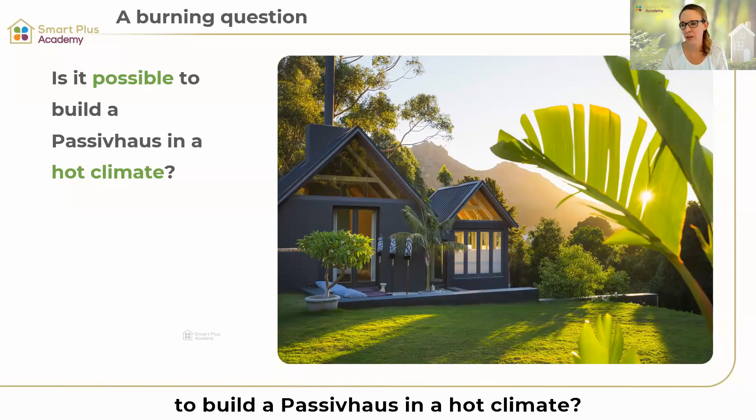I want to address a very burning question with you: is it possible to build a passive house in a hot climate? This is a question I get asked a lot, because after all, passive house originated in Germany, where we have a cool temperate climate, right?

So we all understand that works there, but can we build a passive house in a hot climate as well? To answer that, I want to ask you to imagine something.

Imagine that it's summer, you're at the beach, and you're having a relaxed lunch with family and friends. Because it's hot, you want to bring some cool beverages.

Picture that scenario: would you rather take an esky or a cardboard box for your drinks to the beach on a hot day?

If you said you'd rather take the esky, that's probably the clever answer. So you're taking your esky, and would you ask everyone to close the lid again after taking a beverage?

You probably would, because if the lid is left open, hot air would come inside your esky, which wouldn't help keep your drinks cool. Also, would you put that esky in the sun or in the shade? You'd probably put it in the shade, because that way your drinks stay coldest for the longest duration.

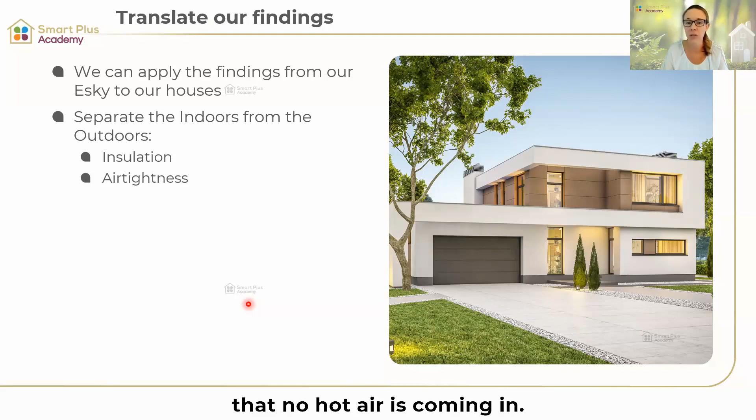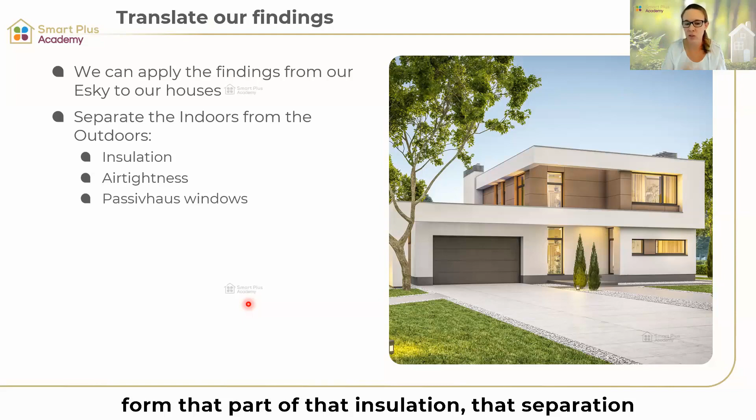We want to close the lid so that hot air is not coming in. We want to close the gaps in our thermal envelope so no hot air gets in. And we want to have passive house windows, which form part of that thermal insulation layer, that separation between inside and outside.

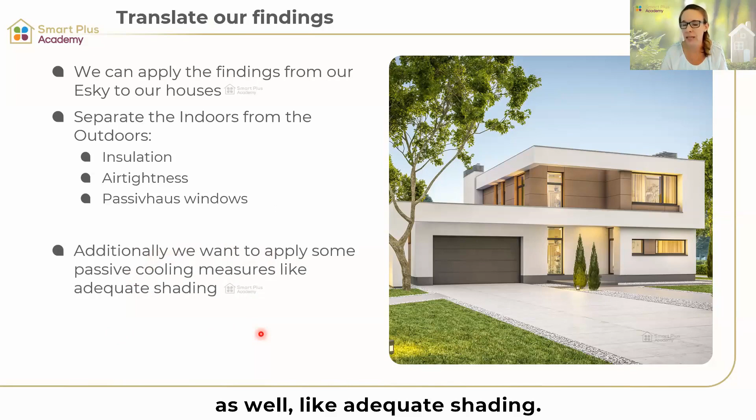Additionally, I asked about putting the esky in the sun or the shade. We want to apply some passive cooling measures as well, like adequate shading. I'll talk a little more about other passive cooling measures we can apply in our passive house, and if overheating is still an issue after all these measures, we can introduce some active cooling.

Like a split system aircon. That's how we can keep cool in our passive house, but we've got a lot of options to stay cool without even touching the active cooling component.

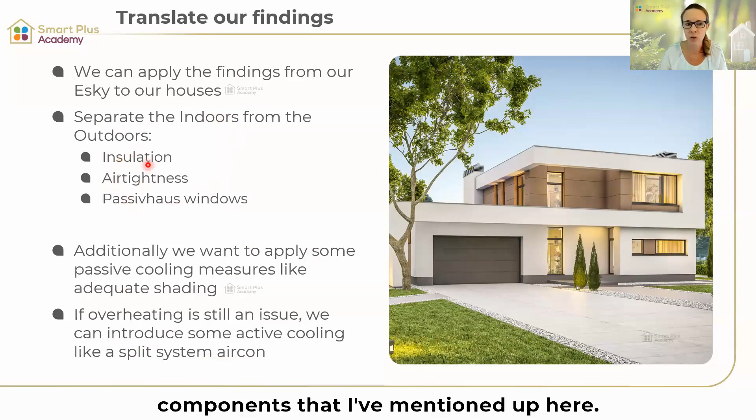We want to talk about that now, why that helps us stay cool in a passive house. So the first thing I want to address is these passive house components I've mentioned, our passive house components.

The first one here is thermal insulation, probably the biggest one to keep us cool. Thermal insulation reduces transmission of heat. It's a material with low heat transport, so low conductivity, that's used to shield a volume against the gains or loss of heat.

We're saying gains or loss because now we're applying that to either a hot or cold situation. The thermal insulation protects against a different temperature, and that works in winter as well as in summer. We can protect against that different temperature no matter where the hot side is, because heat doesn't know the difference between inside and outside.

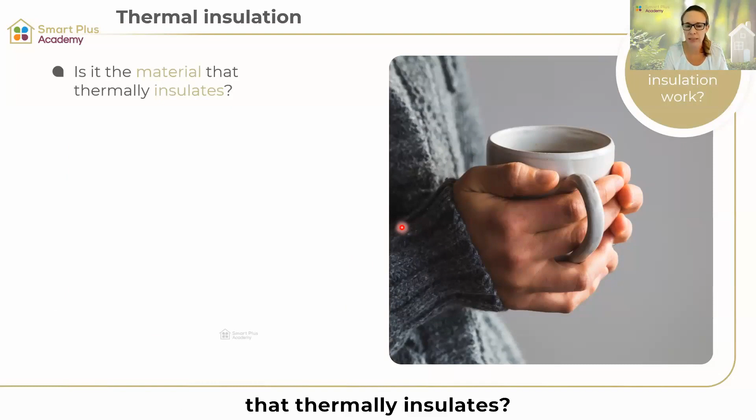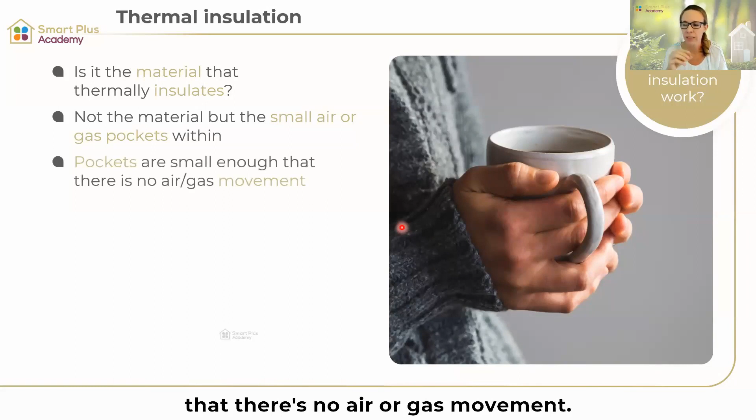So now I want to go a little bit into why thermal insulation works. Is it the material that thermally insulates? No, it's not the material, but it's the small air or gas pockets within that material. The pockets have to be small enough that there's no air or gas movement, so we don't want any convection. Convection means gas movement or air movement. None of that, and then we can talk about a thermally insulating material.

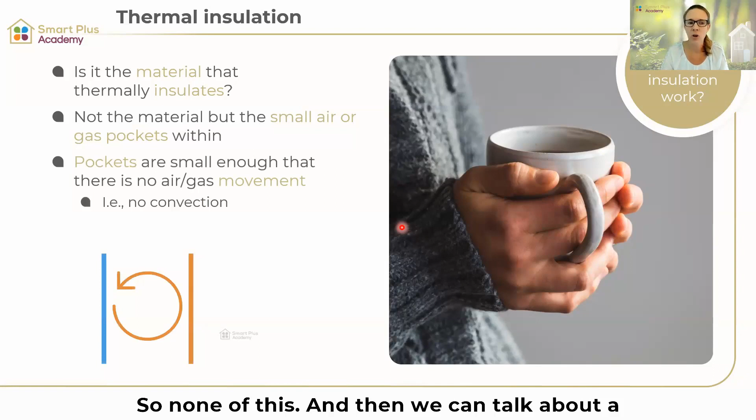Think about all the materials you typically would use for thermal insulation - a fluffy mineral wool, or a foam that has a lot of air bubbles in it. Anything that has air in it is good for insulating. It's a little bit like your woolen jumper on a cold winter night, or like your esky on the beach, where that esky has foam around it that's also full of air bubbles.

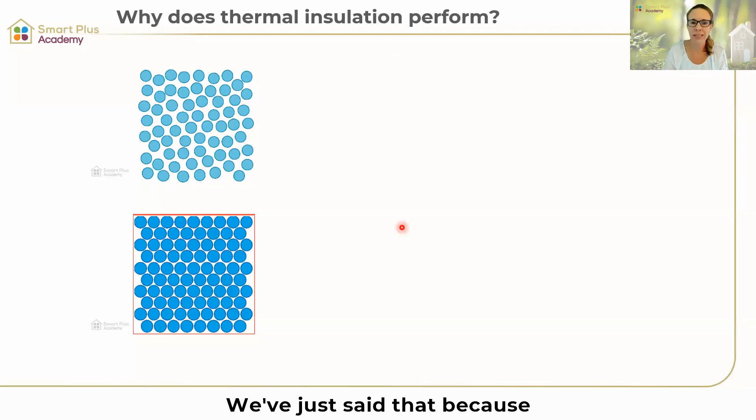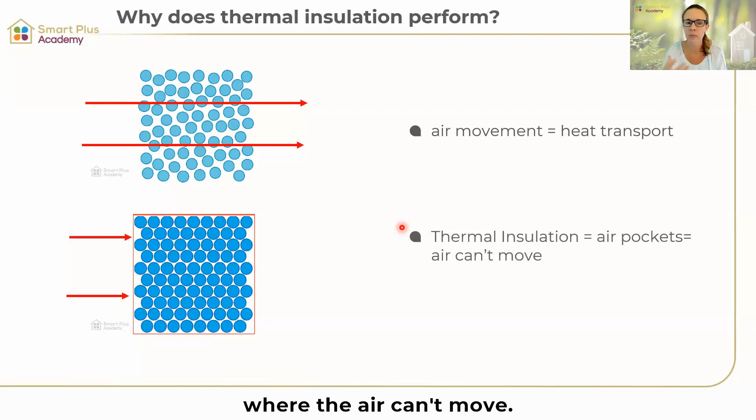Talking about those air bubbles, why does this thermal insulation perform? We've just said it's because we don't have air movement. Air movement always means heat transport - air transports heat from one side to the other, depending on which side is warmer. So what we need to do is isolate that, stop that air movement. Thermal insulation has air pockets where the air can't move. Only when we have inclusion of air that's protected against air movement does that insulate.

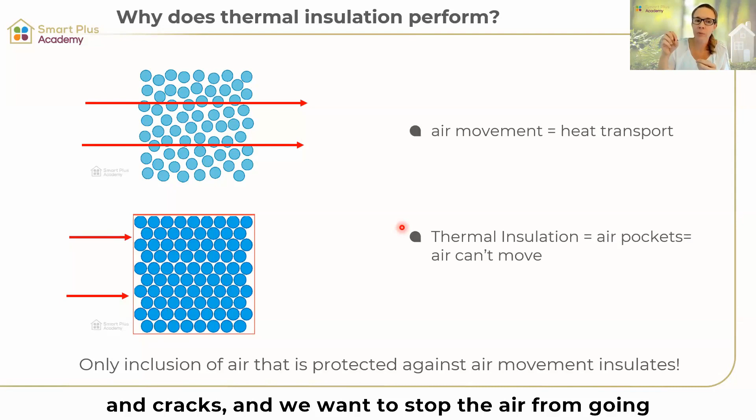That brings us to our second part, which is air tightness. Do you remember how I said close that lid? That's a little different because here it's going through a gap, not through the actual insulation itself, but that's what we want to do. We want to stop the air from going through any gaps and cracks, and stop the air from going through the insulation as well. So our air tightness is really important to isolate the indoor environment from the outdoor environment from any air movement.

That also protects us from hot air coming into our interiors. You could imagine if you had a very well protected home, but you had a gap somewhere, or a crack somewhere, or you left the window open a little bit, all that hot air would come in, and that's why we need air tightness as well.

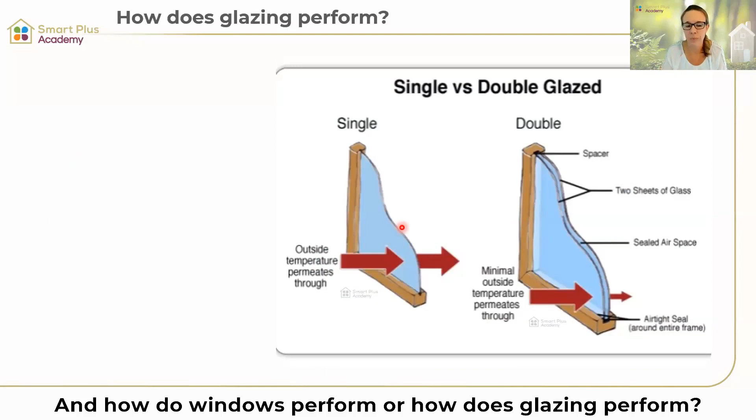Then I talked a little bit about windows. Windows are a big part of the thermal envelope, and they need to perform as well. How do windows perform, or how does glazing perform? If we're looking at a single pane of glass, with or without foil or coating, that doesn't matter - it's not sufficient, it doesn't perform. A single pane of glass doesn't perform because the temperature can just permeate through. Glass is a very good thermal conductor, so it conducts heat very easily from one side to the other.

You would have probably experienced that if you had a glass mug and put some hot beverage in it - you would burn your hands really easily because glass transports that heat really easily. What would you do? You would probably use a double-walled glass where we now have that layer of air in between the two layers of glass, and that's exactly what we're doing with the window. What makes the difference is the air pocket with still air in between. That makes the big difference, and that makes it so it can insulate.

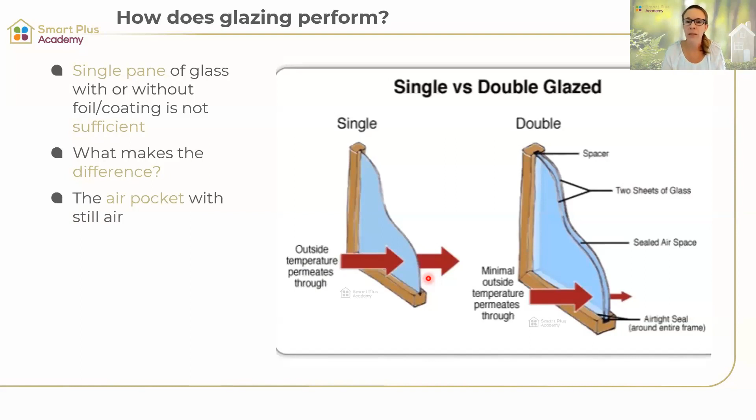Now we've talked about some of the Passivhaus components. It's not all of them, but these are the main ones that keep us separated from the indoor environment and the outdoor environment, that keep us cool.

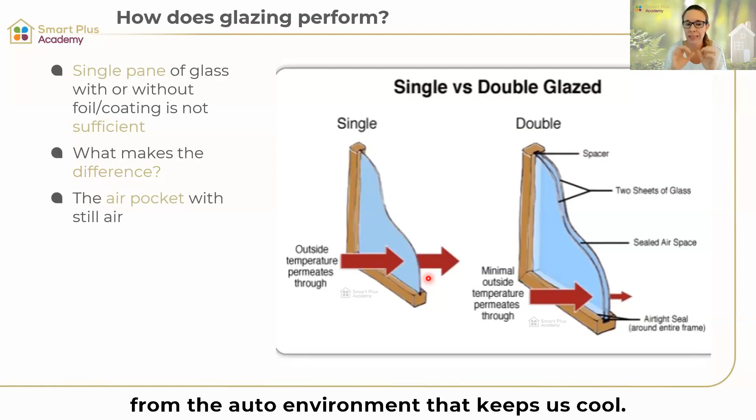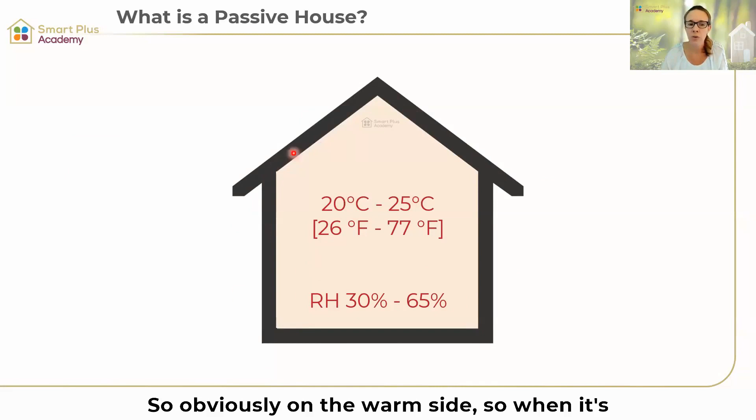What does Passivhaus achieve with such a good thermal envelope? I want to show you this picture. We have our Passivhaus where inside we have our thermal comfort zone between 20 and 25 degrees. That's what we want to achieve. On the warm side, in summer, we stay at a maximum of 25 degrees.

On the hot side, Passivhaus allows 10 watts per square meter to go through our thermal envelope. That's the limit Passivhaus has set. 10 watts per square meter can go through that thermal envelope - that's what we're allowed to let in, and that's what we need to get rid of on the inside.

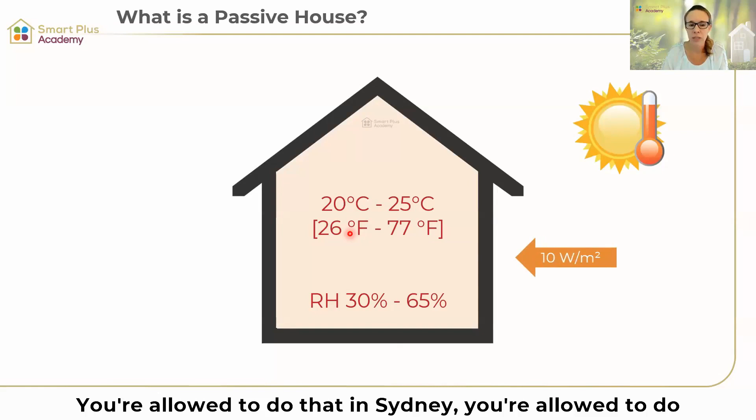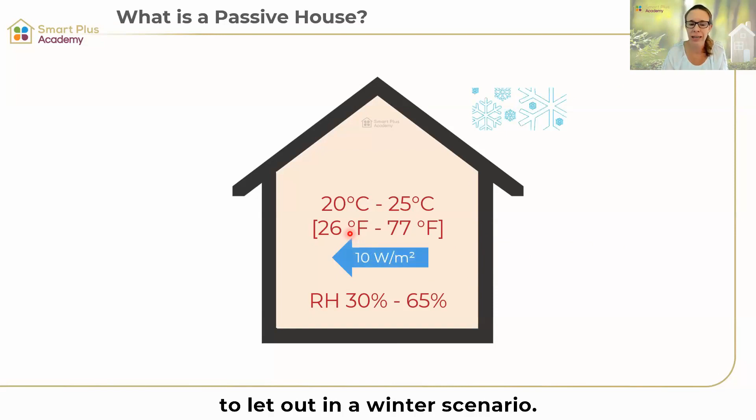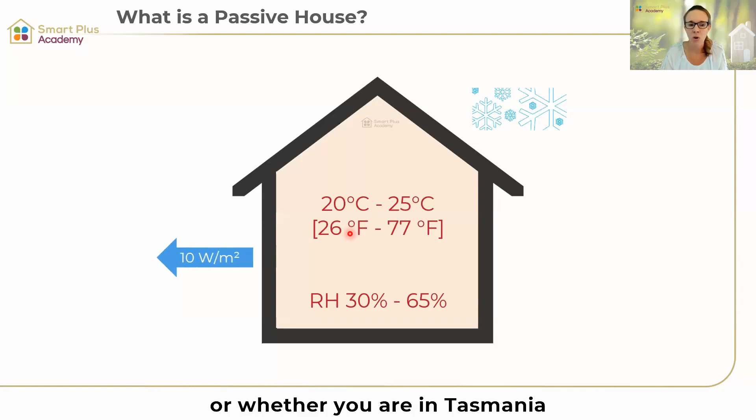This 10 watts per square meter is allowed in Perth, in Sydney, in Germany, and in a very hot country, somewhere in the desert. It's always the 10 watts per square meter. It's also the 10 watts per square meter we're allowed to let out in a winter scenario - on the cold side, that doesn't matter whether you're in Antarctica, Tasmania, or Melbourne. It's always the 10 watts per square meter.

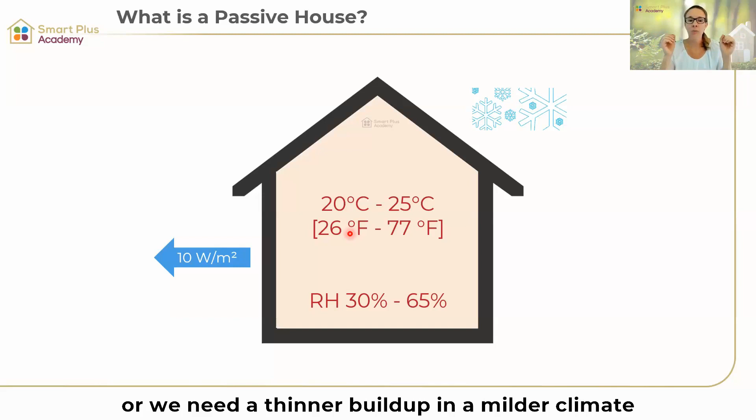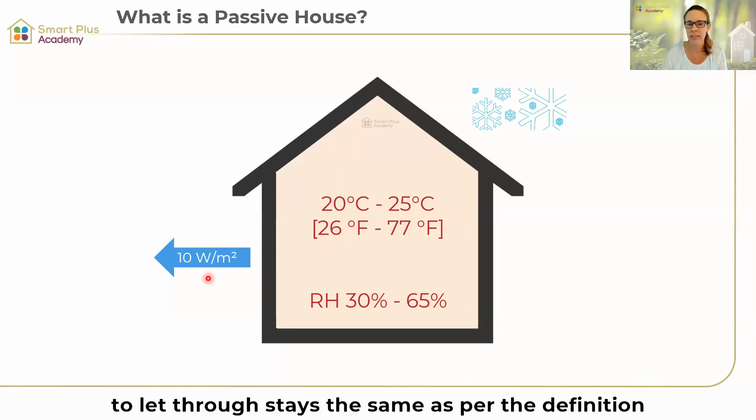What does that mean for our thermal envelope? If it's always the same amount of energy allowed in and out, it means we have to adjust our thermal envelope to the climate condition we live in. In a harsher climate we need a thicker buildup to protect us from that heat, or a thinner buildup in a milder climate. The buildup changes, but the amount of energy allowed through stays the same, as per the definition of the Passivhaus standard.

We could now look at our thermal differences. What is the thermal difference? It's the difference between our indoor temperature - our thermal comfort range of 20 to 25 degrees - and our outdoor temperature, where we have extremes on the high and low side.

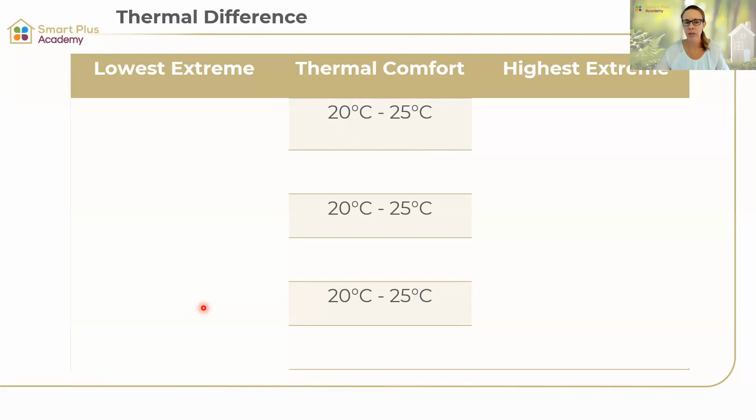Let's look at what happens in different climate zones. We have a thermal comfort range of 20 to 25 degrees. If we live in a climate with a highest extreme of 45, we have a temperature difference to the hot side of 20 Kelvin. Kelvin is another way of expressing temperature difference - between 25 and 45 is 20 degrees difference, 20 Kelvin.

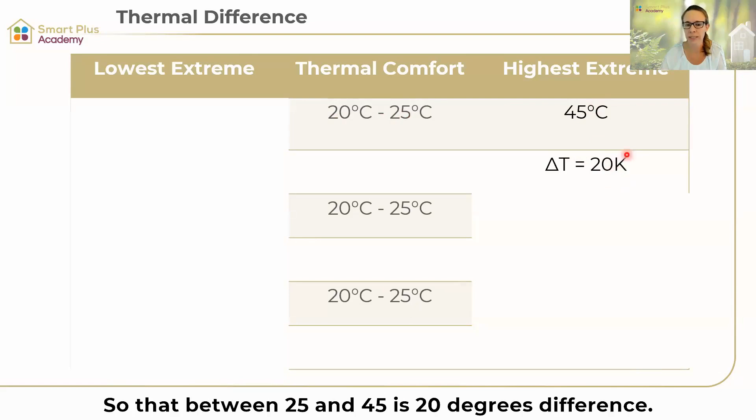On the lowest side, like a typical Sydney or Perth climate, relatively mild, the lowest extreme is about 0 degrees, giving a temperature difference of 20 Kelvin as well. So on both sides we have the same temperature difference, and we have to build our buildup so it can withstand that 20 Kelvin difference.

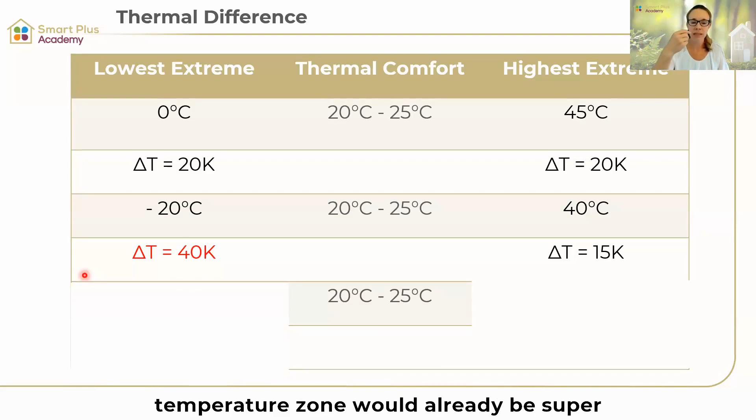If we live in a more extreme climate, like a European or German climate where it gets up to 40 degrees, our hot extreme is only 15 Kelvin, but our cold extreme could go down to minus 20 degrees - a 40 Kelvin difference. That becomes dominant, so we'd have to build our envelope to withstand the 40 Kelvin difference - really thick. This means the building would already be super protected for the hot climate too, since they've prepared for winter, they're also well prepared for summer.

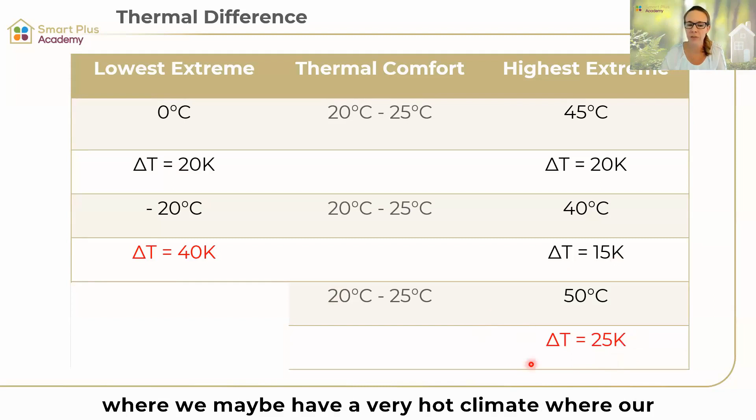Then there's the other extreme, a very hot climate where our highest extreme is higher - say 25 Kelvin difference - and it maybe only goes down to 10 degrees. So we need to adjust the thickness of our thermal envelope to this highest degree extreme on the hot side.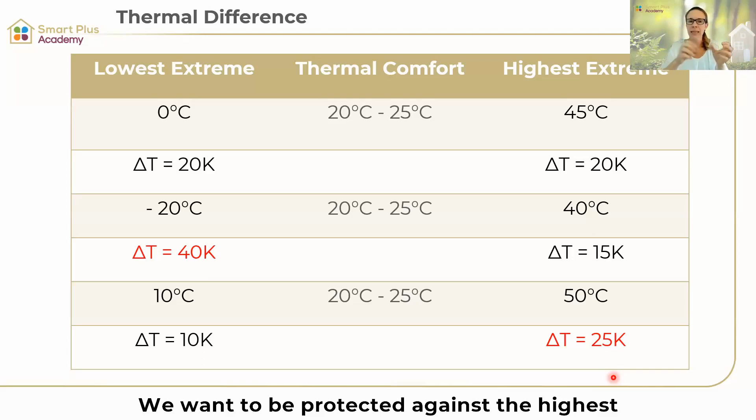So we always want to be protected against the highest extreme that we have, the highest temperature difference. And that's what Passivhaus is doing. We are adjusting with measures like thermal insulation, air tightness, and windows to be protected against the highest extreme in our climate.

Now I want to come to cooling measures. Our thermal envelope protects us from the heat coming in the first place, but we can also introduce other passive cooling measures. I've already mentioned one: shading. I want to talk about a few of these, because that's the first thing you can do in your Passivhaus to stay cool the longest without any additional energy spent.

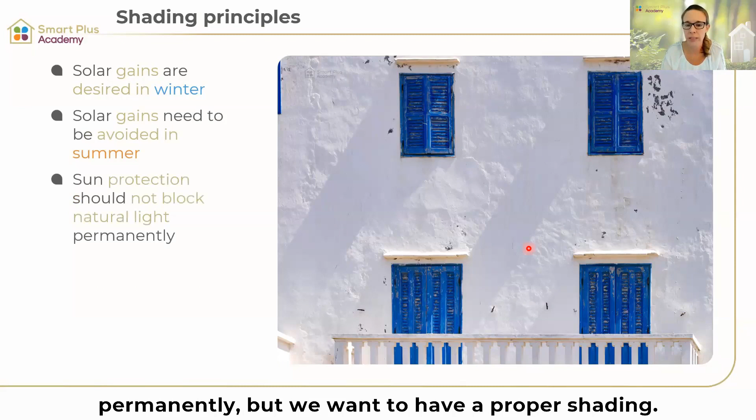So the first really important one is our shading. We probably know this because we've grown up in a warm climate. Shading principles say that while we want sun into our building in winter, we really want to avoid it in summer. The sun protection should not block natural light permanently, but we want proper shading so we're not getting heat in, and we want some glare protection as well.

So how effective, or when is our shading most effective? What we want is the shading object not creating a subclimate between the glazing and the shading object—that's when it works best. A good example could be a mountain in the distance, another building, or trees, because there is enough air movement between that object and your glazing.

But if we have another shading object that we're designing onto our building, these are things we often can't influence. If we're creating a shading object that creates a higher temperature on the glazing surface, then the shading benefit could be reduced.

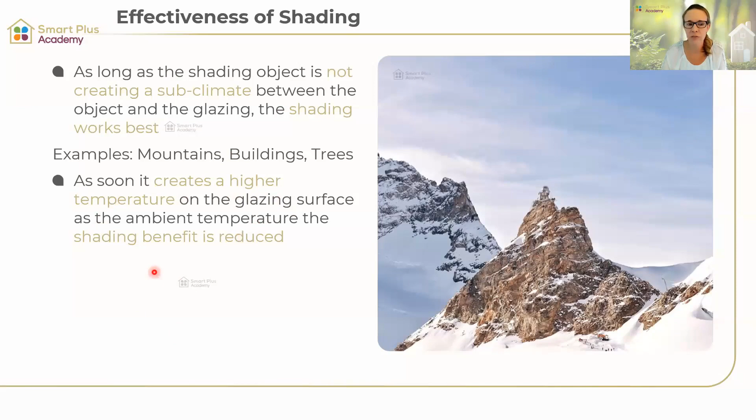So an external blind, even roof overhangs sometimes, could have that negative effect. I want to show you what I mean in the next slide. The effectiveness of shading is reduced by producing this heat pocket. Here we have a blind on the frame.

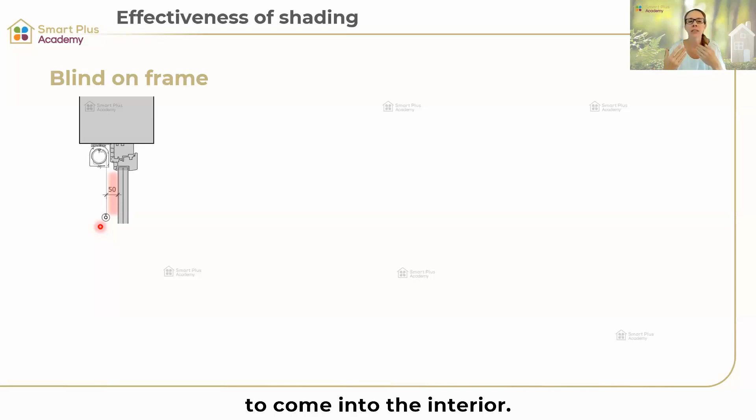Shading devices should always be on the outside. Remember that. A shading device on the inside, like a curtain or a honeycomb blind, doesn't have the same effect because the heat is already in your building envelope. If you shade it from the inside, the heat is already inside, that energy is already inside—we're just delaying it a little bit before it comes into the interior. So shading needs to be on the outside.

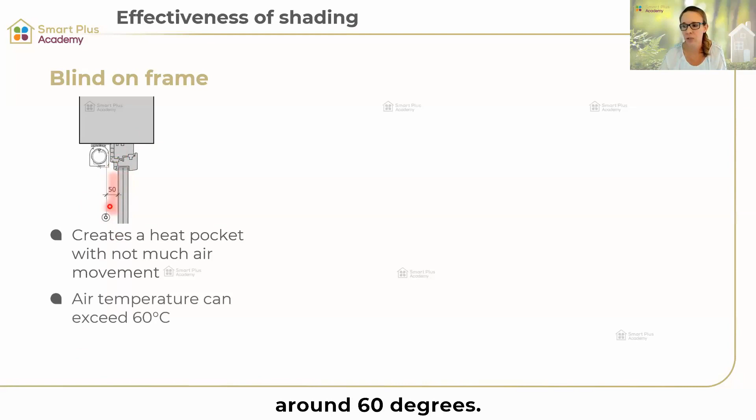Glare protection can be on the inside, but you want your shading on the outside. What happens here is we're creating a heat pocket with not much air movement, and that air temperature in this pocket can be around 60 degrees. So that 60 degrees will come through your glazing inside instead of the 35 or 40 degrees that's the ambient temperature. The same could still happen with a blind on the facade—here there's a little bit of air movement, so a little better, but temperatures can still be high.

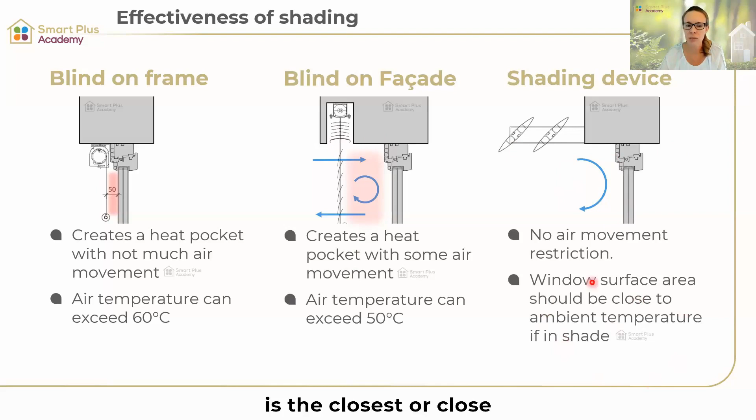Ideally, you want a shading device that looks like this, where we have no air movement restriction, and where the air out here is close to the ambient temperature if it's in the shade. That's your best bet for your shading.

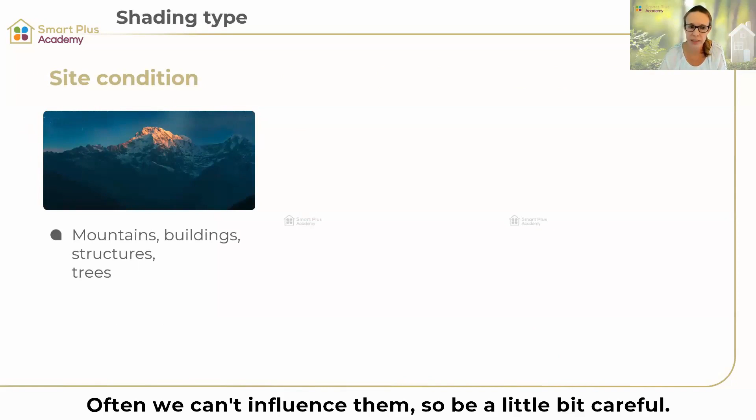Then there are different shading types. As I said, we can have site conditions that give us shading, like mountains, building structures, and trees—often we can't influence them, so be a little careful. If it's a building or tree that could be removed, think about what would happen if that's removed, and whether you need to replace that shading situation.

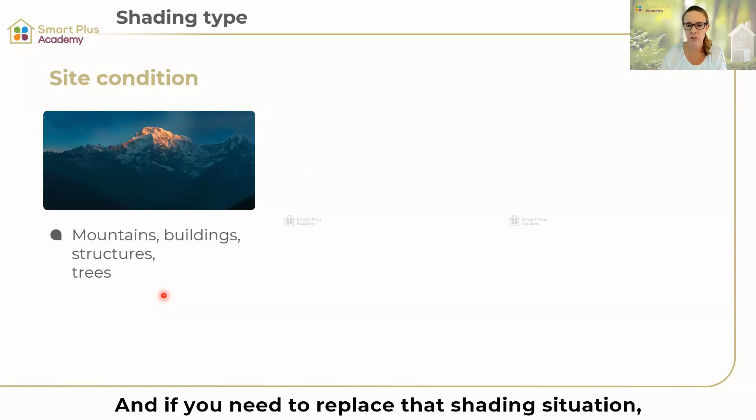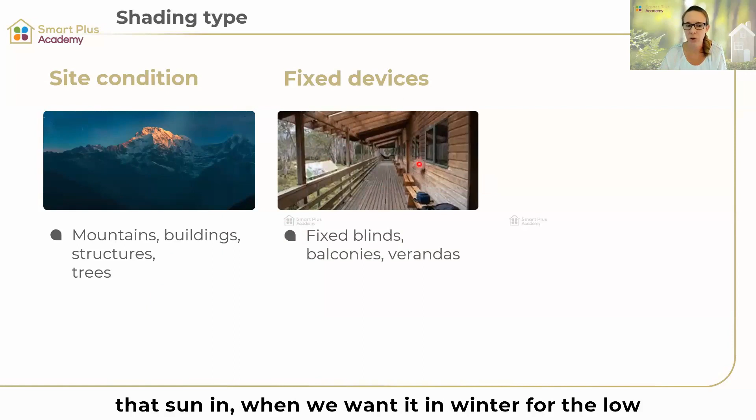Then we can have fixed devices like fixed blinds, balconies, and verandas, which can work really well. They're a little less prone to failure or wrong usage, but we have to make sure we can still get sun in when we want it in winter. For the low sun, we actually want that sun inside to help with heating, but for summer this could be a good option. And then we have movable devices like movable blinds, shutters, and shading sails.

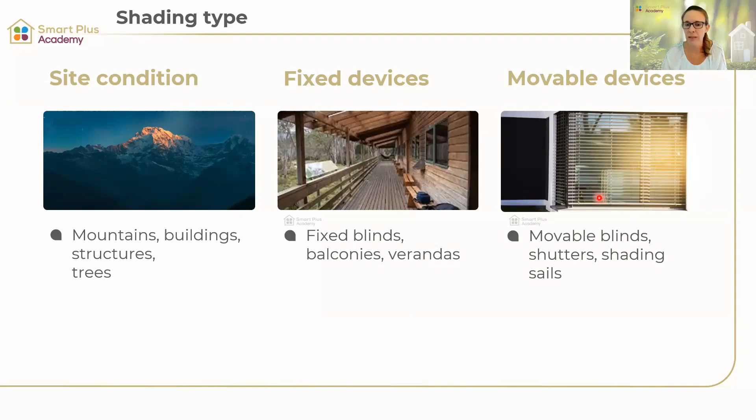They're a good option because they give the user a little bit more flexibility to move it, but also there is then the risk of user error, obviously. But maybe a combination of those would be the right thing to do. Good, so that's one thing.

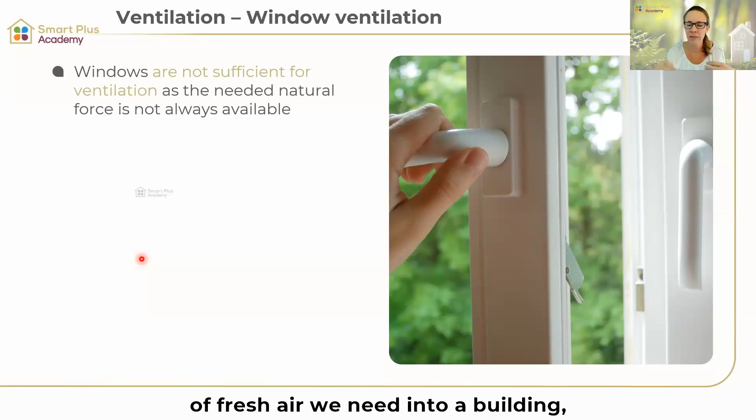Shading is our one passive cooling measure. Then the next thing is ventilation, window ventilation. So what we say and what we've learned in the course - windows are usually not sufficient for ventilation. For the amount of fresh air we need into a building, window ventilation is not sufficient because there's not always enough air exchange happening. Air exchange only happens when we have a pressure difference, and that only happens if we have a different temperature outside, or wind, or a height difference. Some days that's just not given.

So for our fresh air demand, window ventilation is not sufficient, but opening the windows for night purging on a cool night after a hot day, that can be a very valuable support for the cooling system. So that's still good - open your windows when your outside condition is in favor of your inside condition. That happens often when we had a hot day, it cools down nicely at night, and then we could open all our windows. It's a really good support for our cooling system, but it's not ventilation. Remember, there's two different things: ventilation is for fresh air demand, the amount of fresh air we need, and night purging is our support for our conditioning system. So we need to separate that.

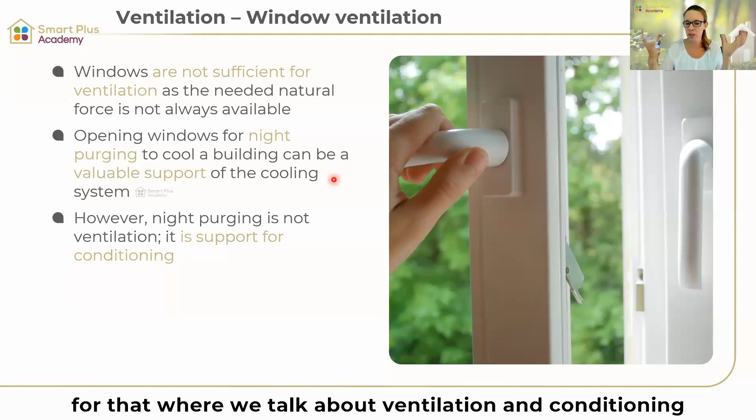I could talk about that a lot more. If you want to learn more, one of our courses would definitely be a support for that, where we talk about ventilation and conditioning and what the difference is between those two.

Now I quickly want to also talk about thermal mass in a passive house, because that's often something that people value as very important in their homes. But I must say that thermal mass is only a storage capacity. The heat is already in the building, and with the thermal mass we can absorb the heat, and the temperature of the air doesn't rise as much and as quickly as without it. So it does have a little bit of an effect, but...

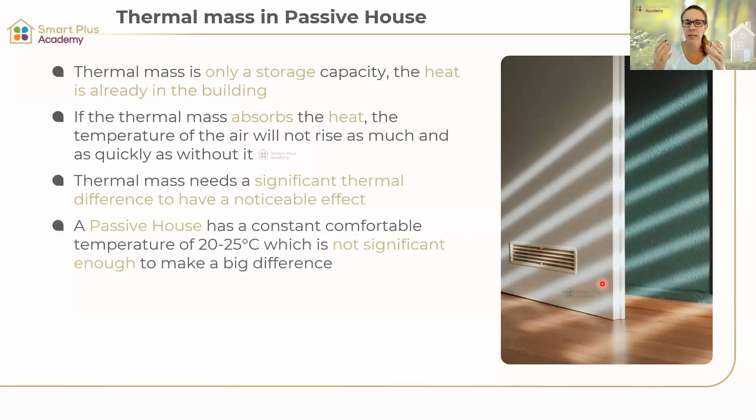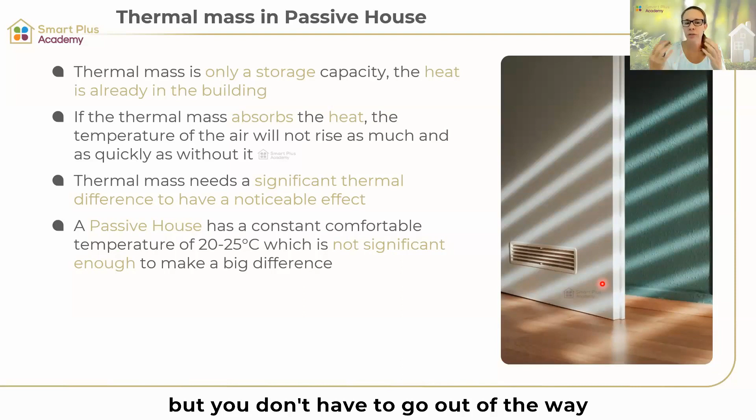Thermal mass needs a significant thermal difference to have a noticeable effect, and in a passive house our temperature is always constant anyway, between 20 and 25 degrees. So this is not significant enough to make a big difference. You'll probably feel a little bit, but it's not significant - it wouldn't make a big difference. So thermal mass in a passive house isn't a big design element. If you have it, it's okay, but you don't have to go out of the way to put thermal mass into your building. It doesn't have a big effect.

The other thing is that thermal mass is not forgiving to user errors. Imagine this: we're here on our summer lunch, we're outside on our balcony, on our terrace, and the people are leaving the doors open all day. It's 40 degrees outside, and everyone's going in and out, the doors are left open. Now all the heat is coming into your building, and the thermal mass would now absorb all that heat. Then the people are gone in the evening, you close your doors, and you're thinking finally it's nice and cool. But now that thermal mass has absorbed all that heat and will release it into the building, and now the building is hotter than it would be without the thermal mass, and you need extra energy to cool that down again, to get rid of that heat stored in the thermal mass.

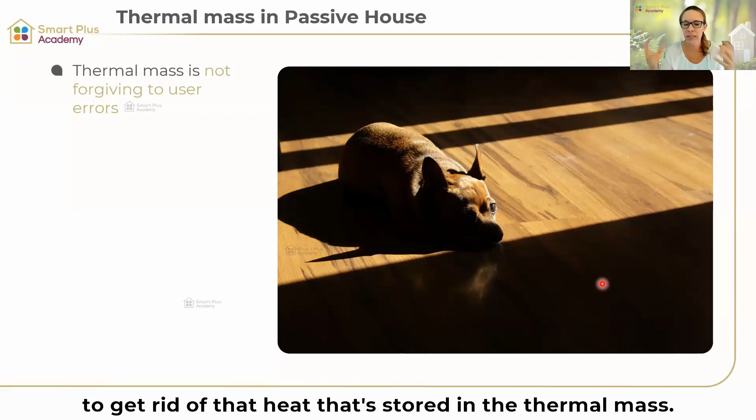It works the other way as well - if the doors and windows are left open in winter and the heat escapes, then you need more energy to heat it up again. So thermal mass could also work against you. Be a little bit careful with thermal mass. It's certainly not something that you have to have in your passive house. It's okay to have it, but it's not a major design element.

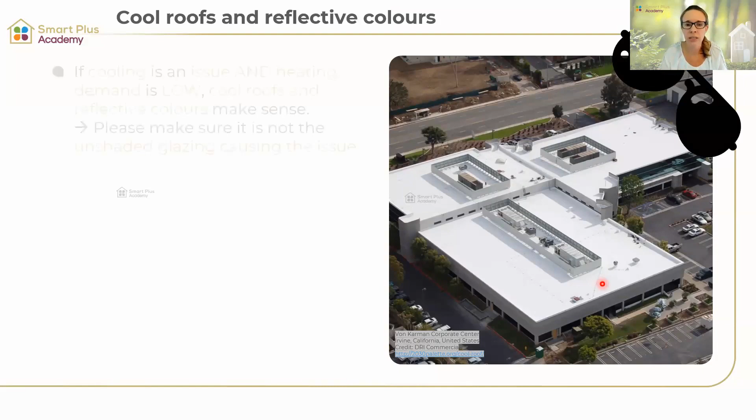And then the last passive measure I want to talk to you about is cool roofs and reflective colors. I think there's been a lot of discussion about this going on, especially with councils - they're sort of promoting this a lot. And if cooling is an issue and heating demand is low, then cool roofs and reflective colors make sense.

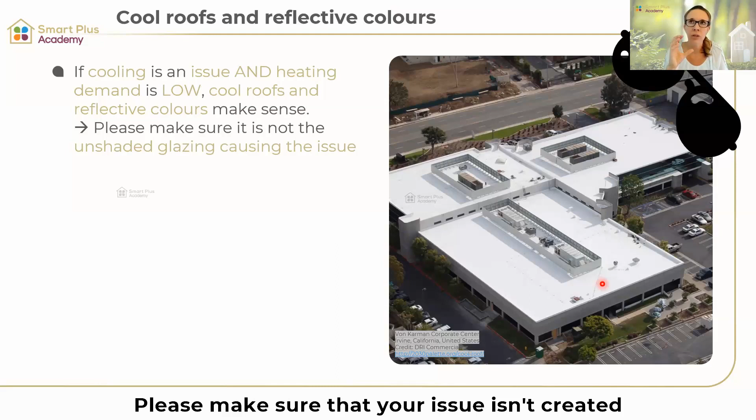Please make sure that your issue isn't created by an unshaded glazing or an unshaded facade, because that's often the case - we have overheating, and the problem isn't really the roof or the color of the roof, but somewhere we haven't put proper shading in for our windows.

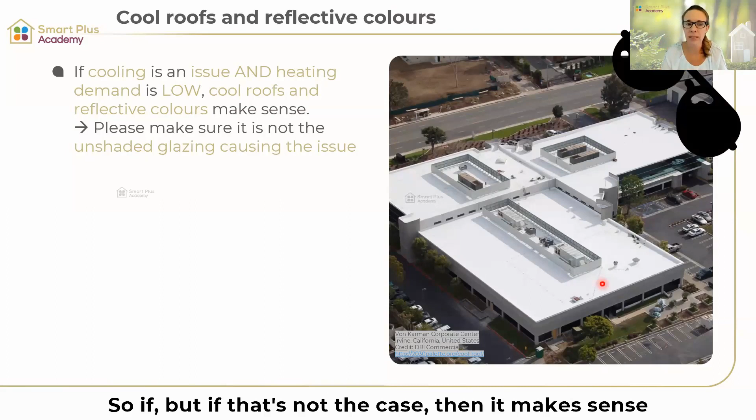So if that's not the case, then it makes sense to have these cool roofs and reflective colors. Make sure that your solar reflectance is bigger than 0.7 and your thermal emittance is bigger than 0.75. This can all be entered into the PHPP, our passive house planning package.

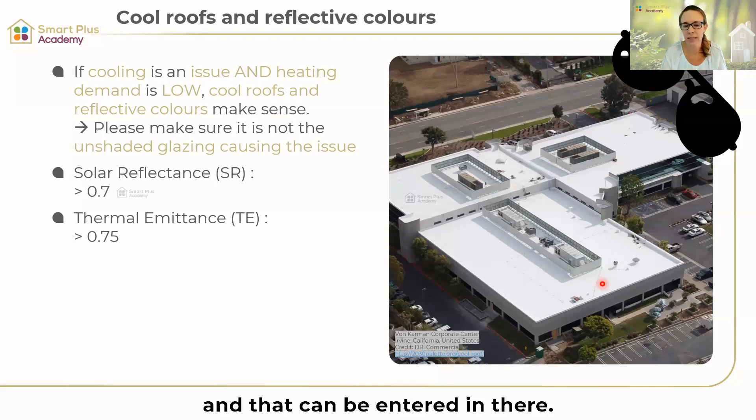So after all this, we've learned about the components that keep us cool, and about passive cooling measures that keep us cool. We could now design our passive house with no conditioning - we don't need an active conditioning system. We're sure that our passive house withstands the heat. And the passive house standard also allows overheating of 10% of the time over 25 degrees.

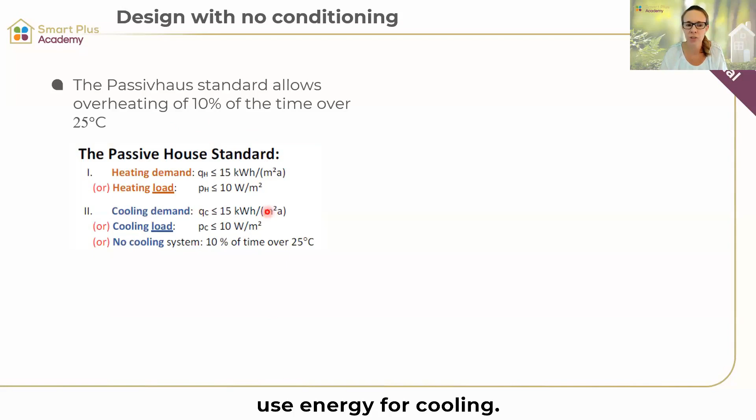So here's a little extract of the passive house standard - not the full standard, but I wanted to show you we're allowed to use a certain amount of energy for heating and for cooling. But we could also say we don't want to use energy for cooling, we want no cooling system in our building. And then we allow 10% of the time over 25 degrees.

So that's what I wanted to point out. Now the question is, is that bad? We're saying we're allowed to have overheating in our home. Some people say, well, passive houses are overheating. Yes, they're overheating by design, by the looks of it, but how bad is that?

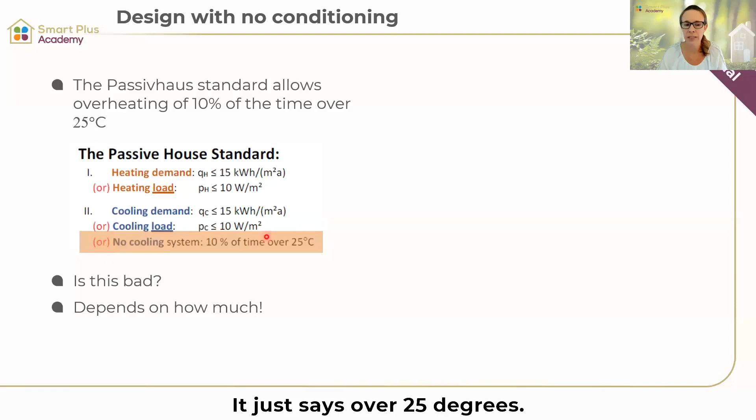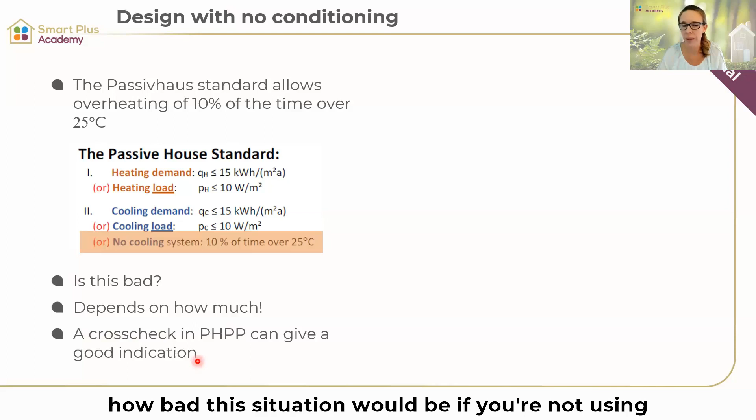It depends how much this overheating is. The standard doesn't say how much the overheating can be, it just says over 25 degrees. What we should do when designing is a cross-check in PHPP, which can give us a good indication of how bad this situation would be if you're not using active cooling measures.

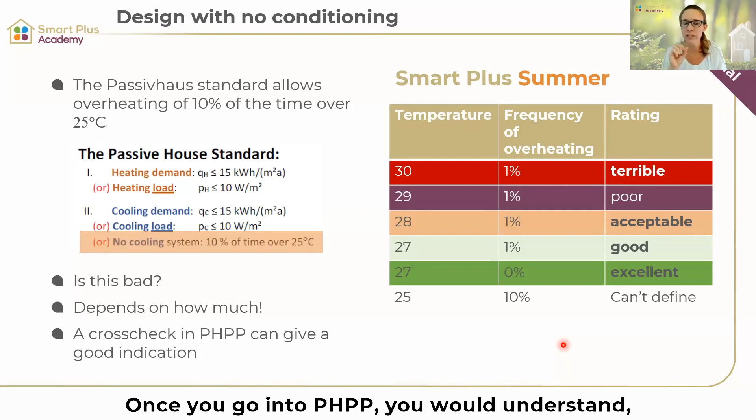For that, I want to show you something we've put together from Smart Plus Academy, Smart Plus Summer, where we're saying we can test our temperatures in our passive house with PHPP. The way we'd do it is adjust our comfort zone. For those who haven't used PHPP yet, don't worry, once you go into PHPP you'll understand - you can adjust your comfort zone temperature.

If that's 0%, then it's excellent, because it means all your overheating happens between 25 and 27 degrees - so your overheating only goes up to 26 degrees. I think we can all live with 26 instead of 25 degrees.

Then if we have 1% overheating at 27 degrees, it's still good. If it goes up to 28 degrees, then it's acceptable. Once we're hitting 29, 30, it's poor or terrible - we don't want a temperature in the home higher than 28 degrees. And that's how we can test it.

That's a very good measure. We're saying that even if we have 20% overheating at 26 degrees, we'd have an excellent outcome, because it's just a little bit warmer - but we need to see how high that overheating is. That's what the Passivhaus standard unfortunately doesn't define, but it's something you should definitely do for your client so you're creating a comfortable, cool indoor environment.

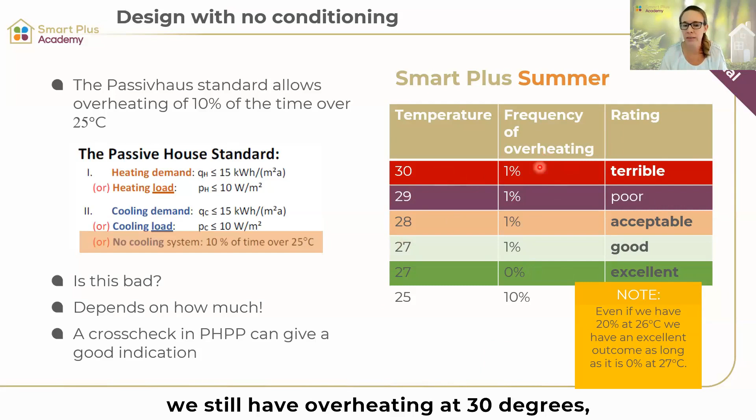So that's designing with no conditioning. If you're saying, look, in my case we still have overheating at 30 degrees, we can't just do it with our Passivhaus components and passive cooling measures - we need some active cooling measures. That can be done. Active cooling measures can always be implemented if you're saying that, yes, we'd have too much overheating, or we just want that little bit of extra comfort.

Now, the question is - is overheating an issue? We're saying that cooling is only needed when the sun is shining.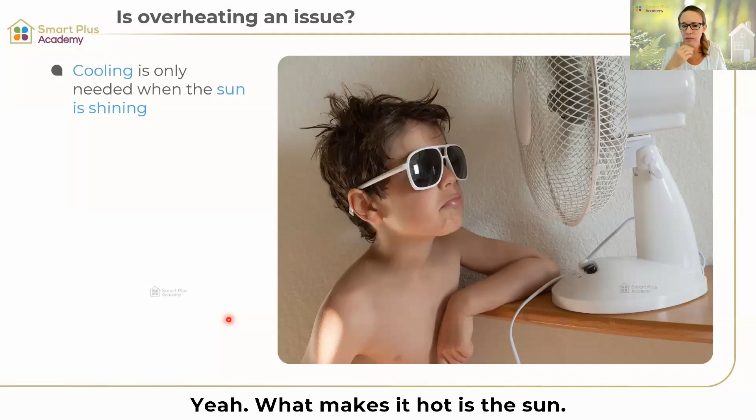What makes it hot is the sun, and the sun is out there when the cooling is needed. Our PV solar system can create energy at that time, so cooling is not an issue, and building in hot climates is easier than in cold climates.

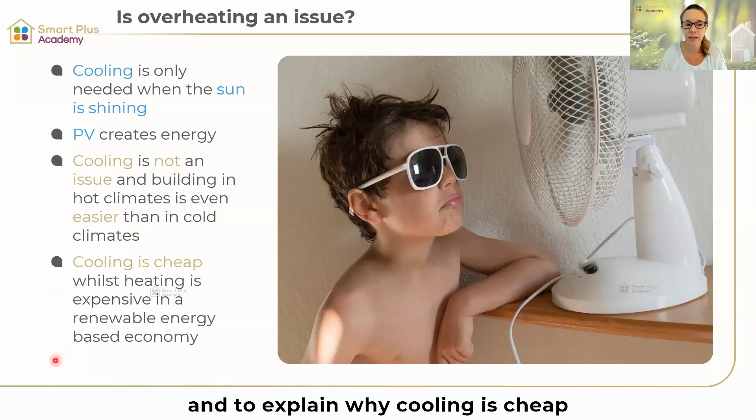Cooling can be cheap, but heating is expensive when we're looking at an economy where we want to use renewable energy. Let me show you a graph explaining why cooling is cheap and heating is more expensive, looking at sustainable energy.

So we're looking at wind, water, and solar - this is the amount produced. We can use some of it directly, which is ideal because we have the least losses. If we're using solar directly from the roof to cool or run our fridge, that's best because we don't have to store it. Once we have to start storing it, we always have losses.

That's the problem. In a summer situation where we only need short-term storage - enough energy during the day that we just store into the night - we have pretty good efficiency, around 80%. But if we need to store it from one season into the next, say from summer into winter, we have a lot more losses.

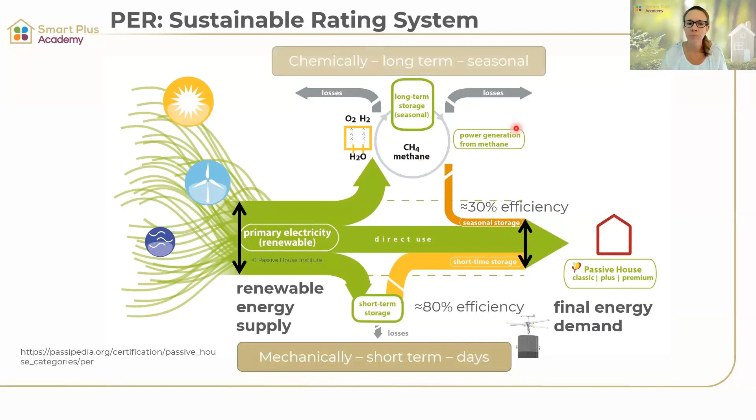This is a chemical storage - I don't want to go too deep into that, but here we only have 30% efficiency, so 70% of the energy we're producing gets lost in that storage process. That's why heating will be a lot more expensive in the future if we're only looking at sustainable energy, unless we find some solution to store it cheaper with fewer losses.

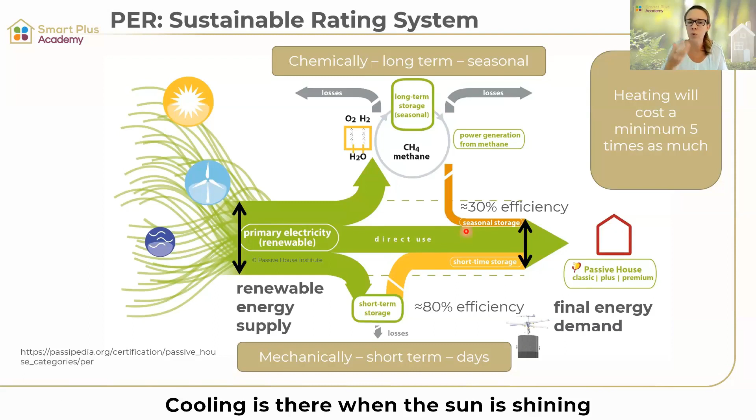That's why cooling is not a problem - it's available when the sun is shining and we have that energy. The best approach is to condition with a split system, which is usually the easiest and most economical.

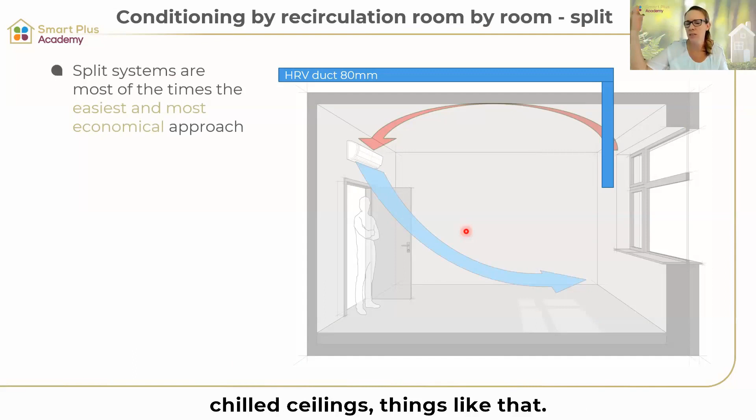There are other options like cooling surfaces and chilled ceilings, but they're all more complicated. The split system is the easiest approach. Obviously they're not the prettiest, but they can be hidden in bulkheads or a cabinet - it's up to the architect or designer to make that nice, hiding it in a wardrobe or bulkhead so it's not so visible.

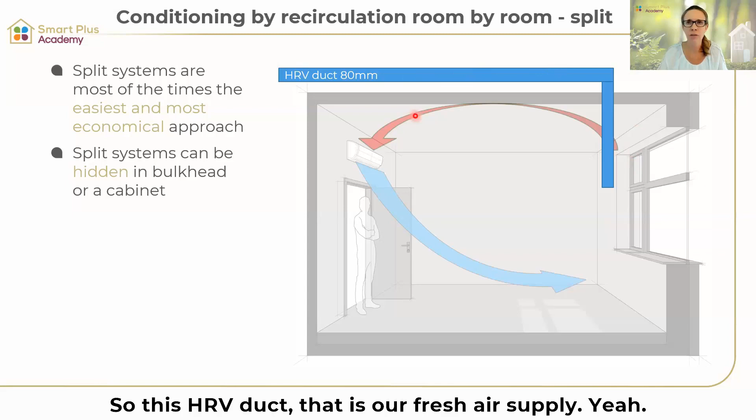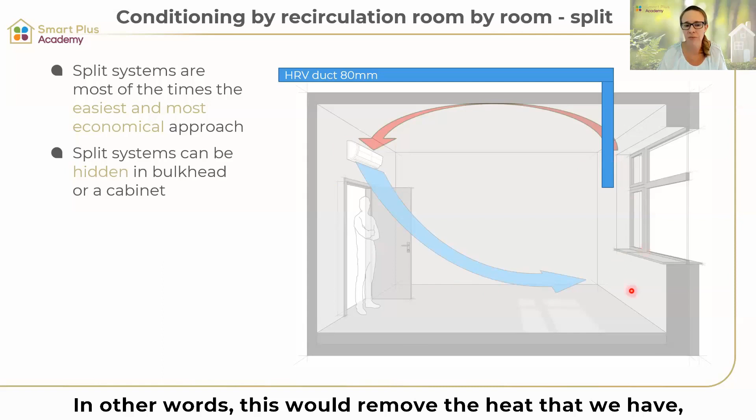Let me explain that picture a little more. This HRV duct is our fresh air supply - that's not conditioning, just fresh air coming in. Our split system does the conditioning, removing the excess heat in our room.

With split systems, because they move a lot of air around, drafts can be an issue since we have recirculated air. But the beauty of Passivhaus is that we can condition our building at any time - we're not time dependent because Passivhaus holds temperature for a long time, as we discussed with thermal protection.

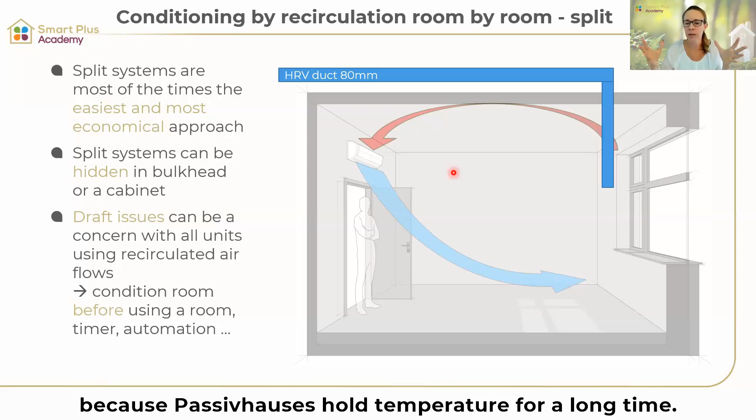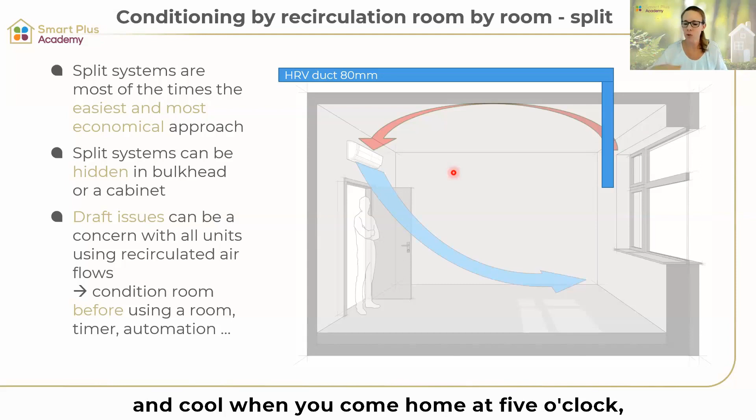If we're cooling our building, say you cool it in the afternoon at 3 o'clock for half an hour, your building stays nice and cool. When you come home at 5 o'clock it's still cool - you don't have to run the split system while you're at home. You can run it when the PV gives you the most energy, and the passive house keeps that coolness inside.

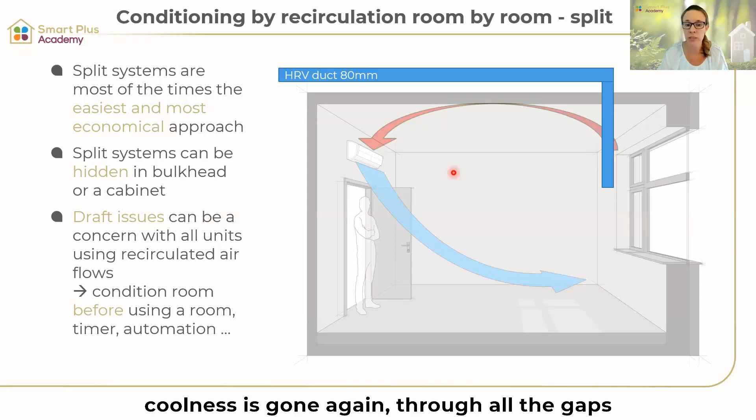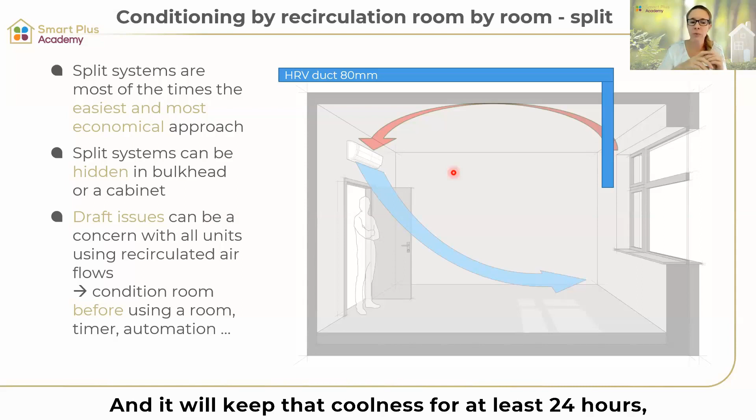Unlike a leaky home, where once you turn the aircon off all that coolness is gone through gaps, cracks, and non-existent thermal insulation - that's the beauty of passive house. We can cool whenever we think it's right, and it will keep that coolness for at least 24 hours, depending on what's happening outside.

That concludes the presentation about Cool Comfort.